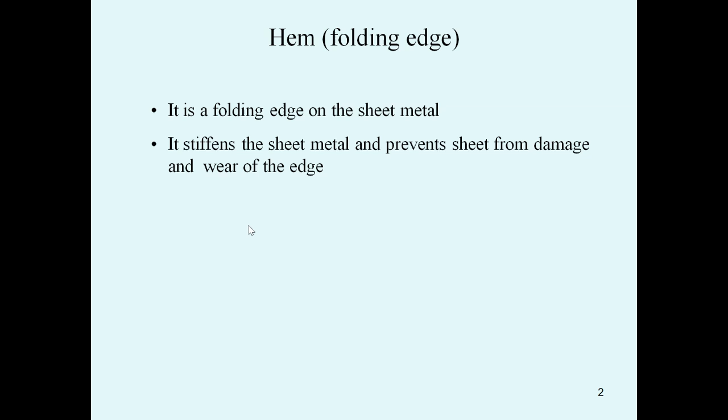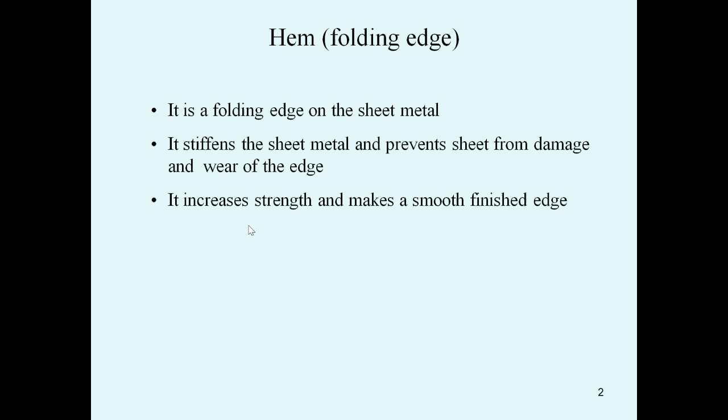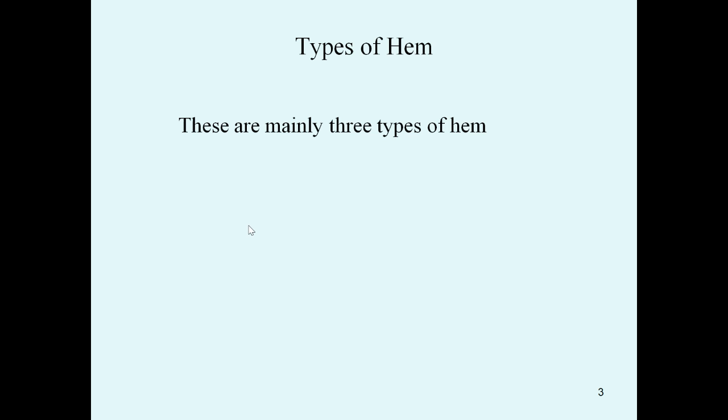Next, it can increase the strength and makes a smooth finished edge. So by hemming process, we can increase the strength of the sheet or folding edge and make smooth finished edges of a sheet. Now we can see what are the various types of hems. There are mainly three types of hems: the first one, the single hem, second, a double hem, and the third one is wired edge.

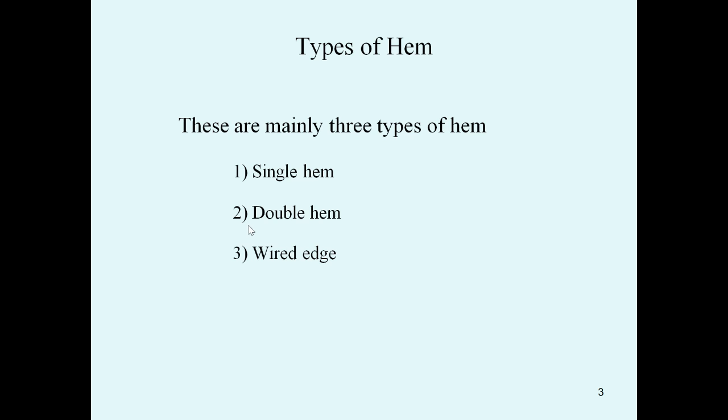Now we can discuss the first type of hem, that is a single hem. Here we can see both the diagrams. In picture one, we can see the layout of the sheet, how much the sheet should be bent. Here we can see the value of w. This is the width of the sheet which is to be folded or bent. In this figure we can see the bending operation of a sheet in a single hem.

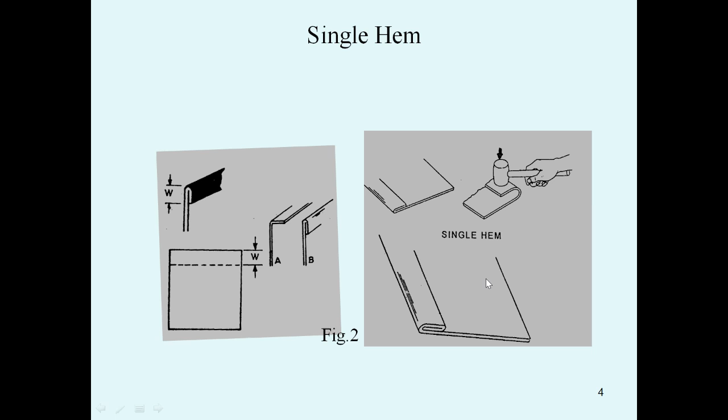Single hem is made by single folding of the edge of the sheet metal. So single hem is nothing but a single folding of the edge of the sheet metal. For the sheet, the edge is folded for a single fold. That comes under the single hem.

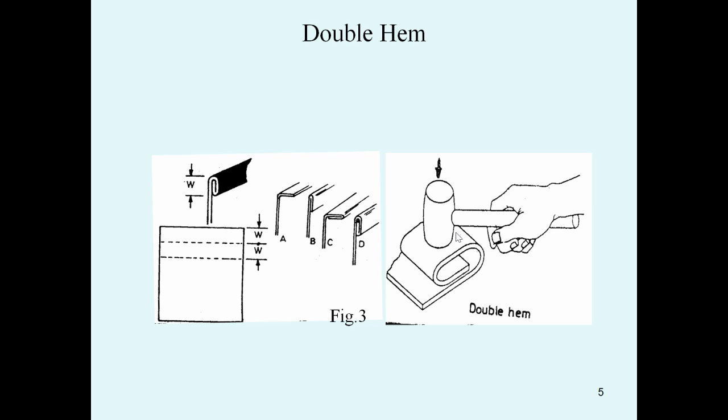Next is double hem. This is a diagram of a double hem. In this diagram we have two widths, the first width and second width which are going to be folded. First we have to fold the upper edge of the sheet for a single hem. Then again it should be folded, so folding of the sheet twice. Here, with the help of a ball peen hammer or soft hammer, we are making a double folding of the edge of a sheet.

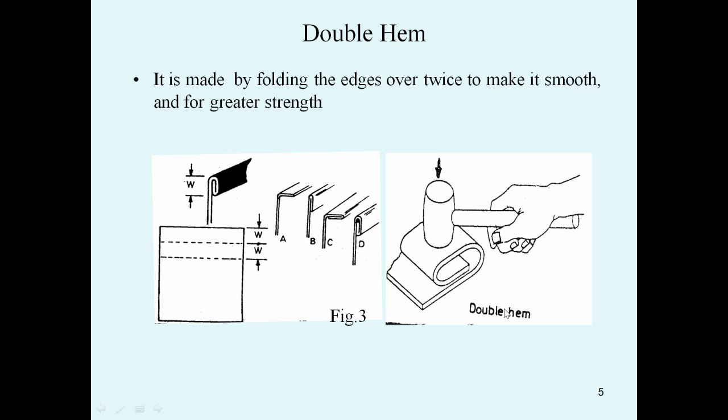Double hem is made by folding the edges over twice. Twice is nothing but two times. It is made by folding the edges of a sheet over twice to increase the strength of the folding. By folding the edges of the sheet over twice, greater strength can be obtained. In these figures we can observe the folding of the edges of the sheet twice.

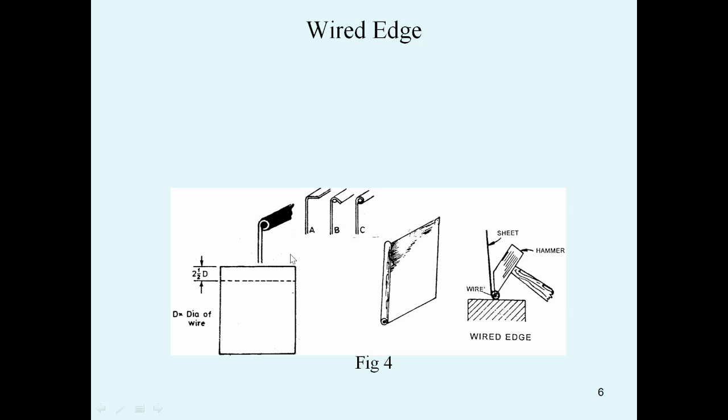Next is a wired edge. We can see the diagram here. This is a diagram of a sheet which is going to be folded like a wire. With the help of a hammer, the sheet is going to be folded like a wire. Here we can see the operation or procedure to fold it like a wire.

Wired edge is the process of folding a piece of sheet metal around a wire of a given diameter, so that we can get a small diameter of the folding of the edge. Next, it provides greater strength than the single hem and the double hem.

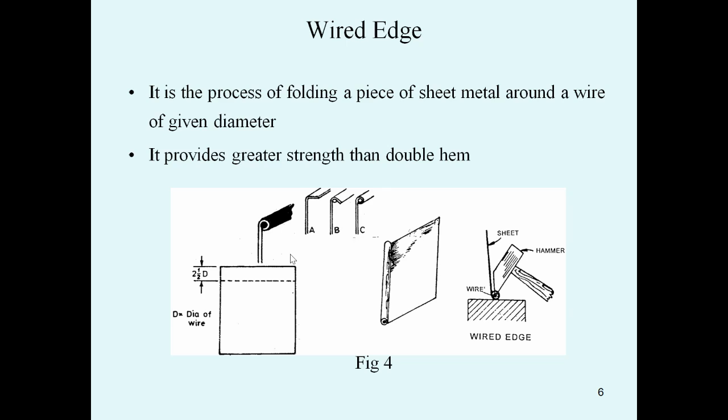Next, allowances for the wired edge. Two and a half times the diameter of wire is taken to fold it around. So two and a half times the diameter of wire.

So it is taken to fold it around. Okay, take it round. So suppose, for example, if a diameter of the wire is 3 mm, that is, if a 3 mm diameter is used, then two and a half times, so it is 7.5 mm. So 7.5 mm must be allowed to form a wired edge.

Okay. So suppose, in case we are using a 5 mm diameter, then how many millimeters must be allowed? So it is 12.5. That is two and a half times, no? So 12.5 mm must be allowed to form a wired edge.

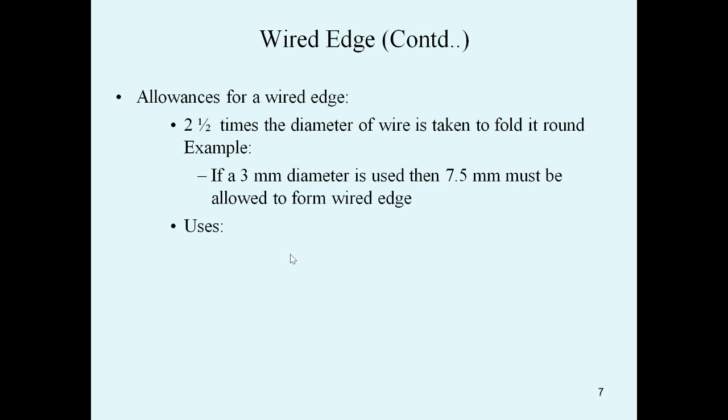Okay. Then we can see the uses of wired edge. So wired edge is formed on articles like funnels, cups, and trays.

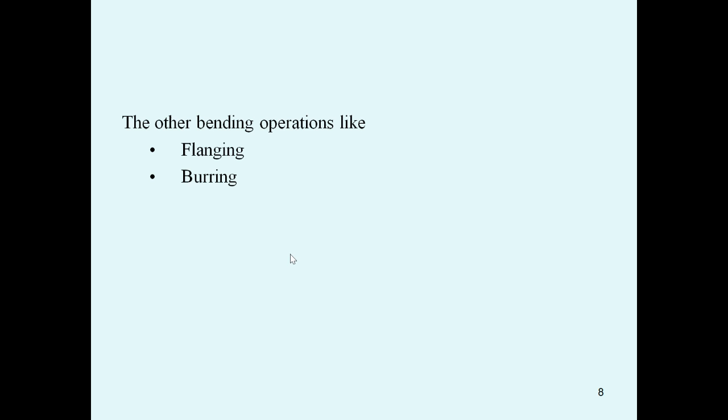Okay. Next, we can see the bending operations like flanging, burring, embossing, beading, raising, hollowing. So these are the different types of bending operations: first is flanging, second burring, third embossing, fourth beading, fifth raising, and sixth one is hollowing.

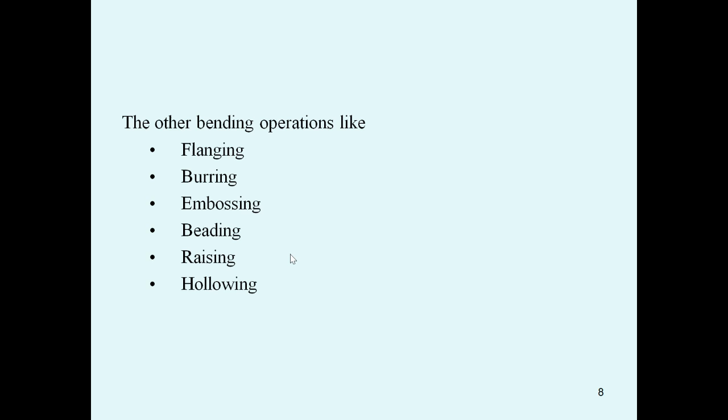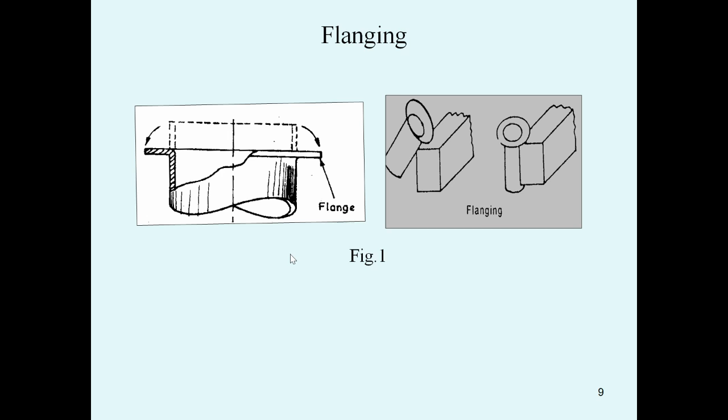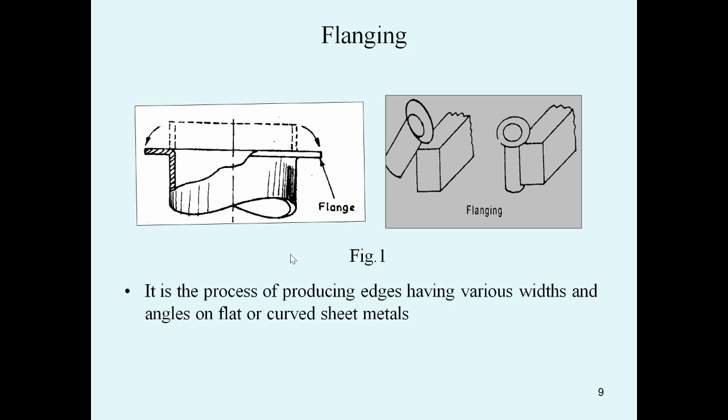You can see here, these are the diagrams of the flanging bending operation. We can observe both the figures. So flanging is the process of producing edges having various widths and angles on flat or curved sheet metals. For curved or flat sheet metals, we can produce edges of various widths and angles.

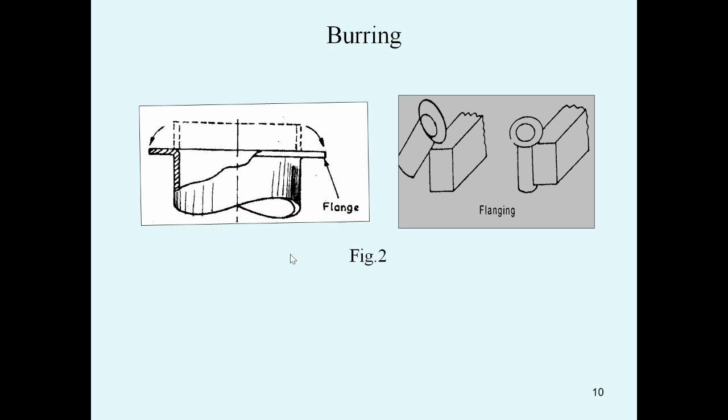Next one is burring. You can see a similar diagram of a flange. So it is the process of making a narrow flange. It is performed on burring machines. So this burring operation can be performed only on burring machines.

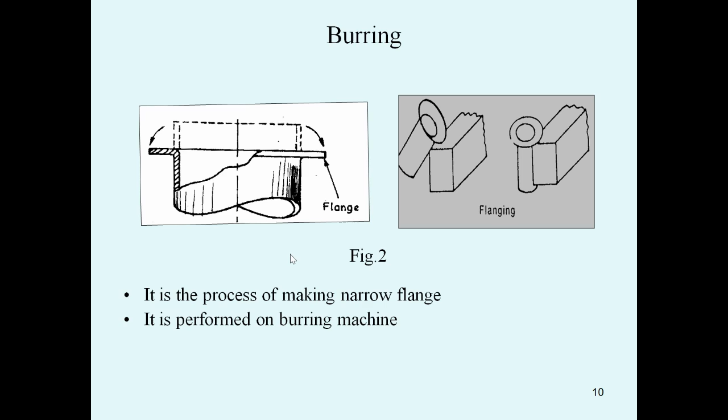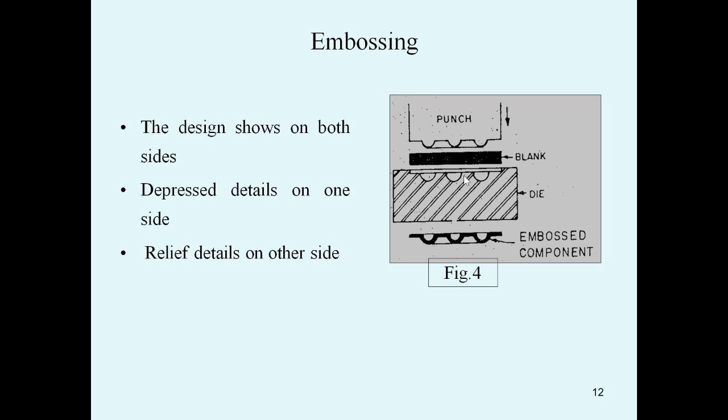Next, you can see the applications of embossing. Letters, that is alphabets, and fancy designs on thin sheets can be obtained.

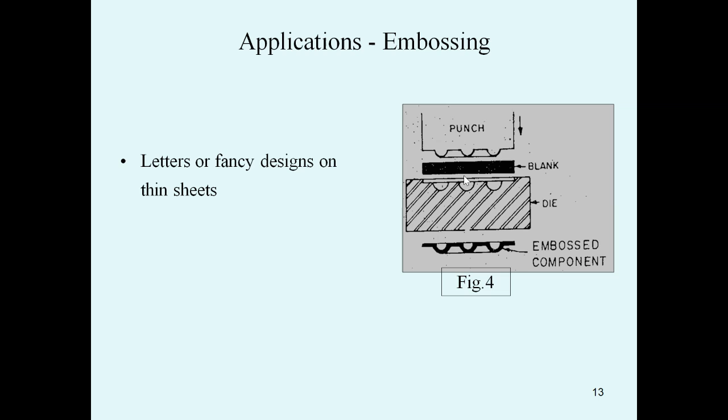Next bending operation is beading. A sheet metal worker beads the surfaces of sheet metal products for a different and neater appearance, and to increase the strength of the sheet. Beading is done with rotary machines and beading rolls.

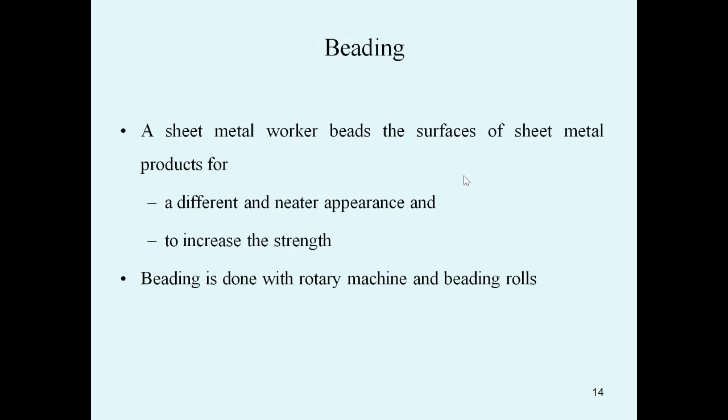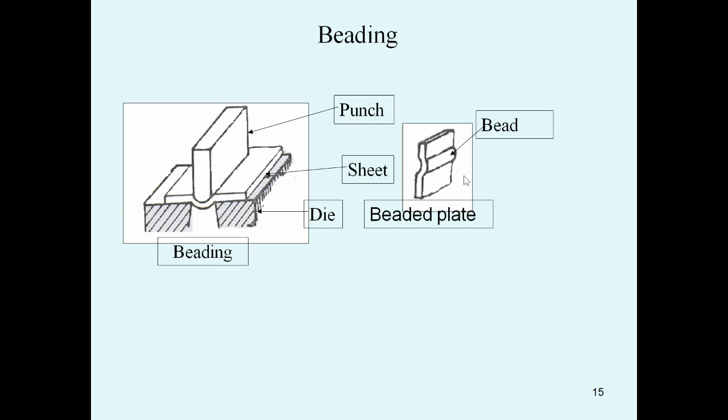Next, this is a diagram of the beading operation. That is the punch and the sheet blank, and this is a die. This is a component, a beaded plate or product. That is a bead. We can observe the figure to get each and every part: the beaded or curled edge.

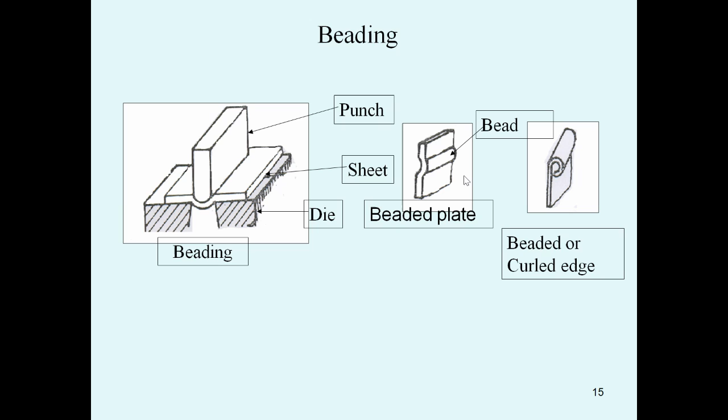Next we can see raising. Raising is the process of making a depression on a flat surface so as to form curved shapes. We apply pressure on the blank sheet so that it forms a curved shape. It is performed by a raising hammer and a raising block.

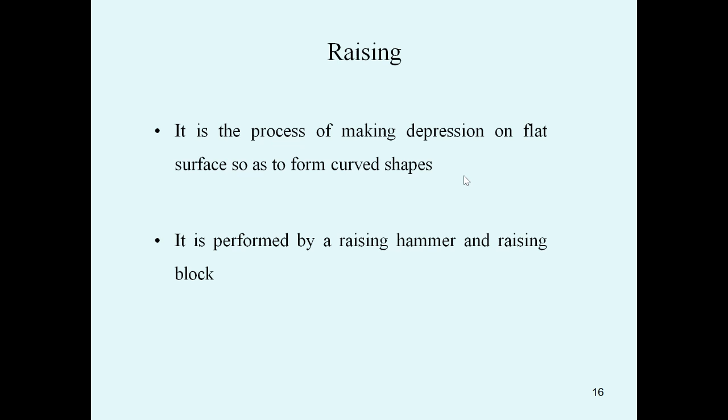So we can see here. Sorry, we are not using any punch and die here. Here we use a hammer, soft hammer, and the stakes. It is performed by using a raising hammer and a raising block. This is a diagram of a raising operation.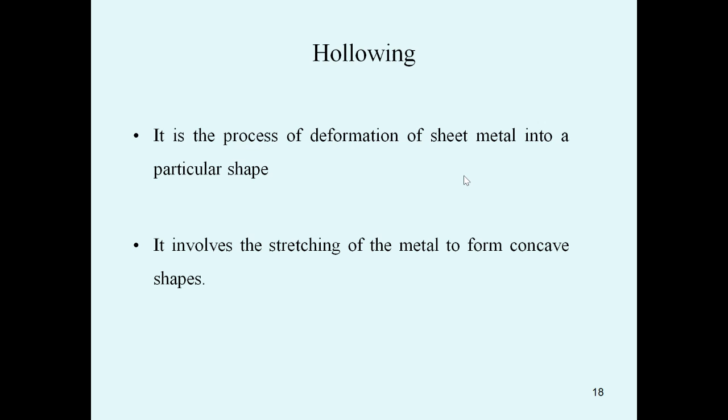Next, you can see the hollowing process: hollowing a bowl on a sandbag. Here we can see this will be a sandbag, and he is doing hollowing.

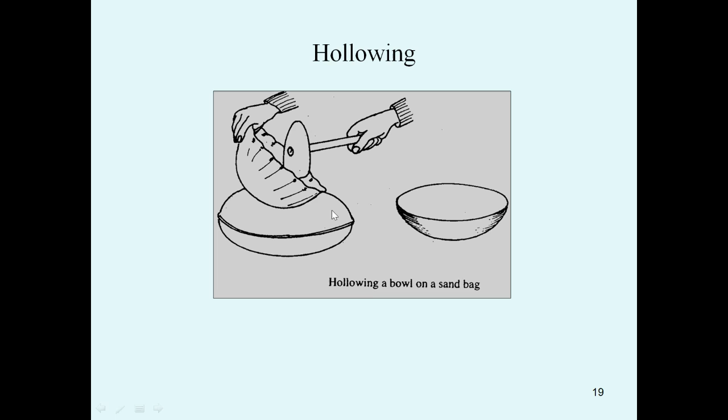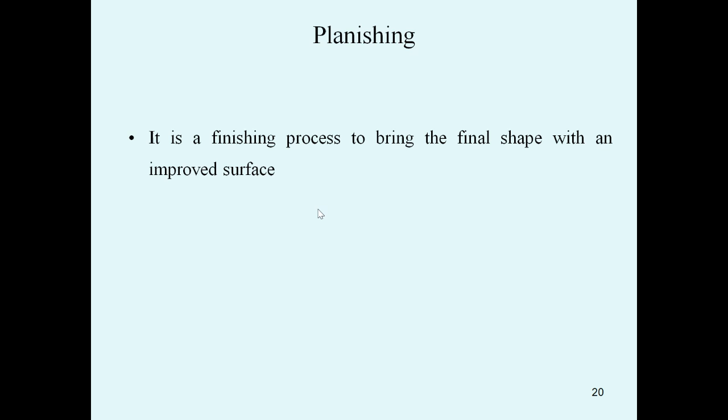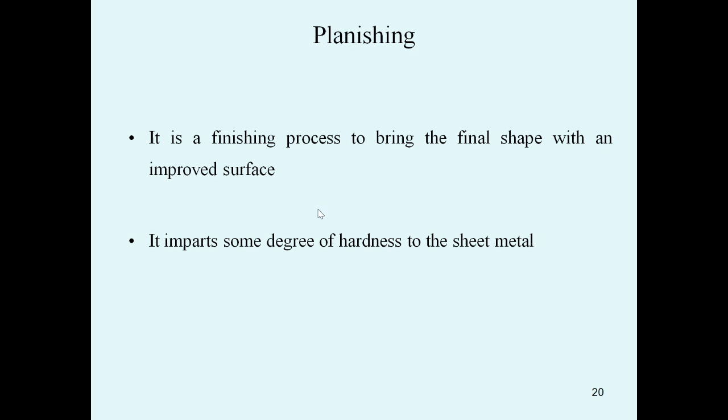Next one is planishing. Here we can see the planishing operation. It is a finishing process to bring the final shape with an improved surface of the sheet metal. It imparts some degree of hardness to the sheet metal. Here we can see the planishing operation.

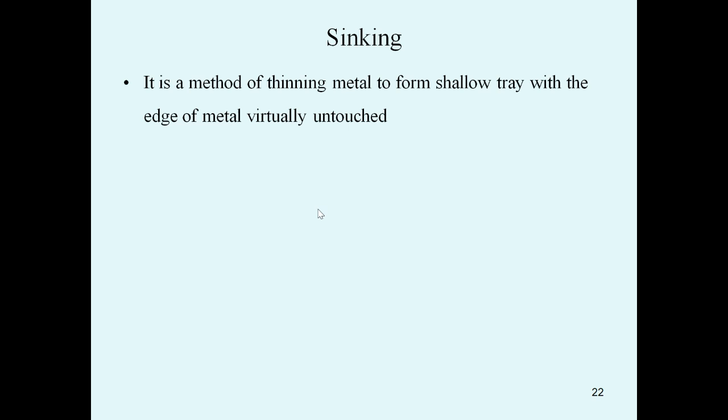Next one will be sinking. It is a method of thinning metal to form shallow trays, with the edge of the metal virtually untouched. Here we can see a diagram of sinking. Here we can observe the parts: hardwood, guide pins, metal thinned.

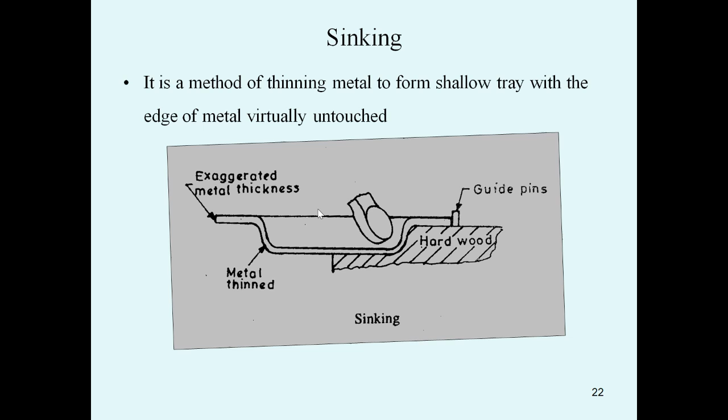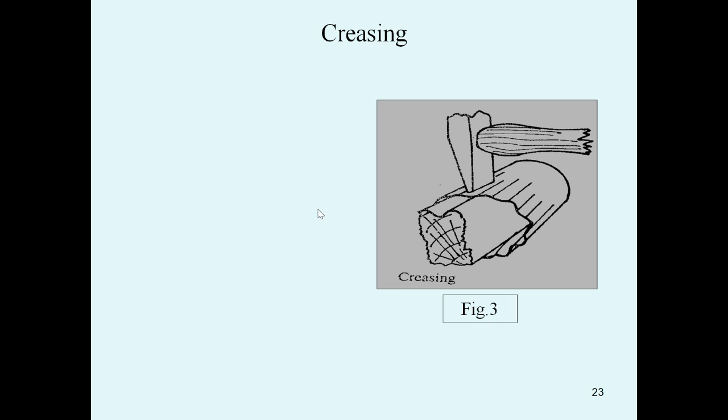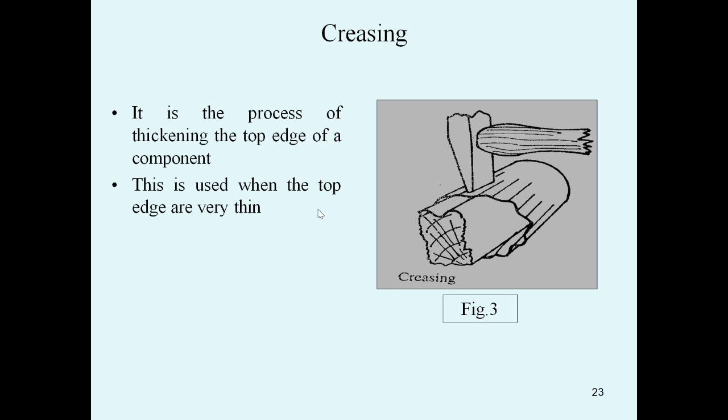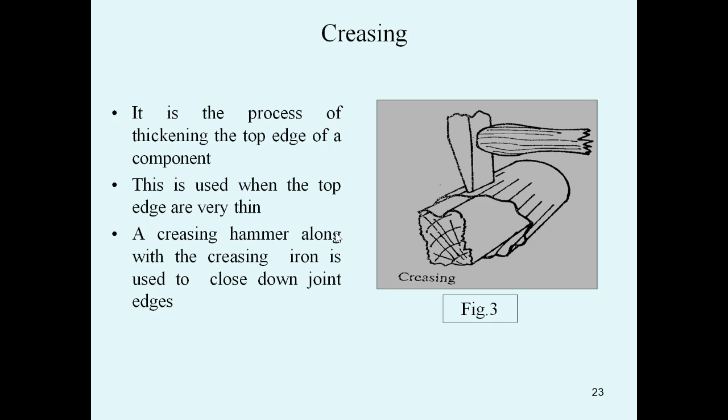Next is creasing. Here we can see the creasing operation. It is a process of thickening the top edge of a component. This is used when the top edges are very thin. A creasing hammer along with the creasing iron is used to close down the joint edges of the sheets.

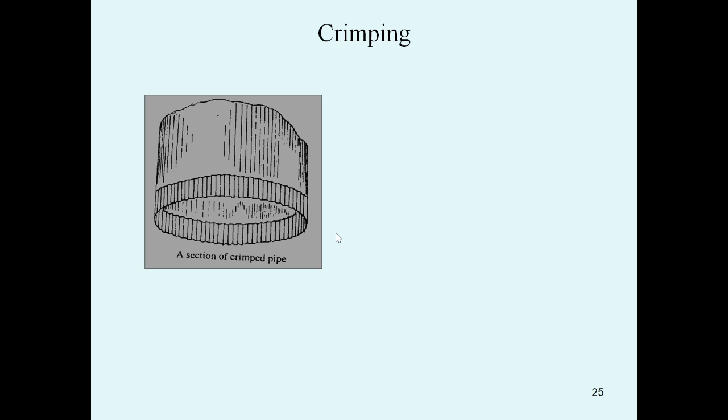Next one is crimping. Crimping is used to corrugate and reduce the size of one end of a pipe so that it will fit into another pipe of the same dimension. You can see here a section of crimped pipe, which is fitted into another pipe of the same dimensions. This is the process of crimping.

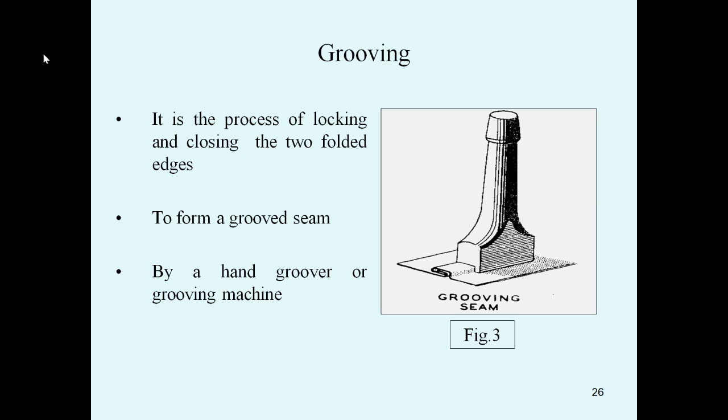Here we take two sheets or a single sheet. Suppose we take two sheets: we fold the edges of the sheets into a grooved shape so that we can lock the two sheet edges and increase the strength of the joint, forming a grooved seam. This operation can be done either by a hand groover or by a grooving machine.

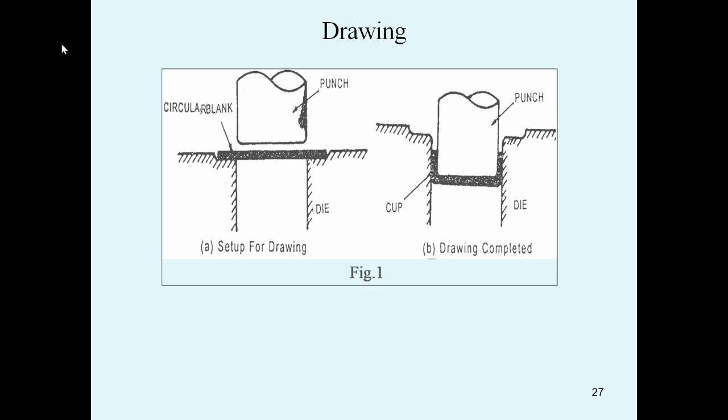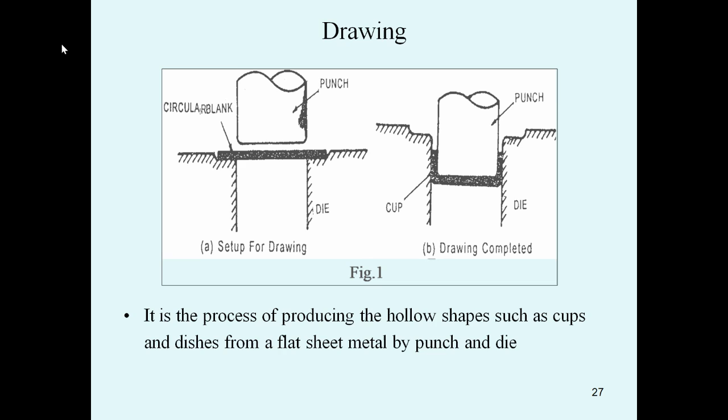If the height of the component or product prepared in this process is greater than the diameter or width, that is called deep drawing.

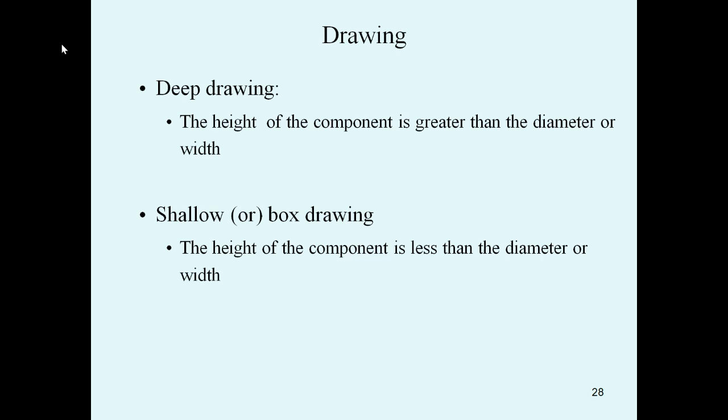Next is shallow or box drawing. Here, the height of the component is less than the diameter or width of the punch or die hole.

Next we can see the operation of squeezing. Squeezing is the process of deforming the sheet metal in a cold state by applying a greater amount of pressure with the punch and the die.

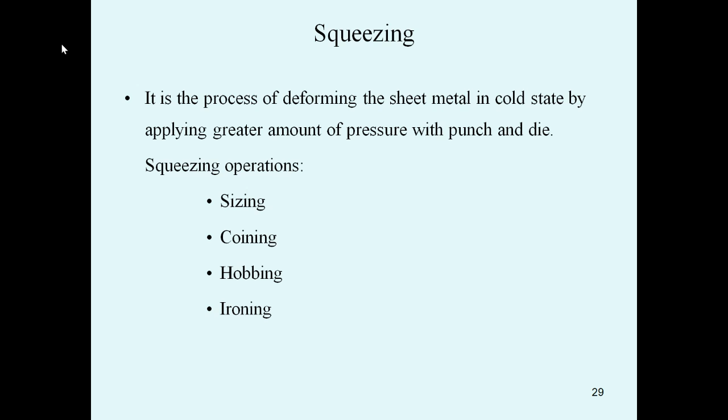The squeezing operations include sizing, ironing, hobbing, and coining. In all these four squeezing operations, we deform the sheet metal in a cold state using a greater amount of pressure with the help of a punch and die, and the procedure is almost the same.

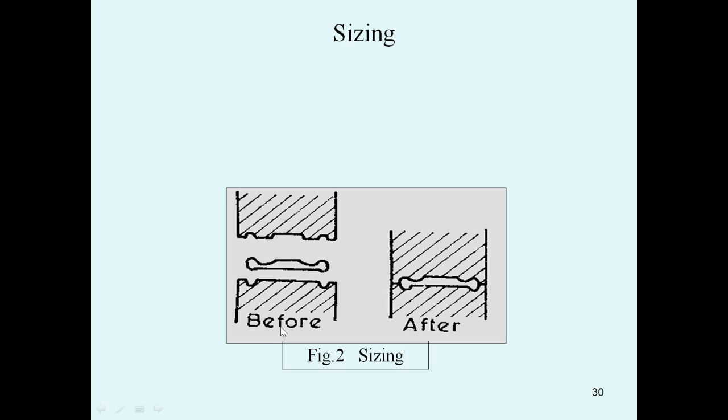Now we can see the sizing squeezing operation. Here we can see the before figure, and this will be the after - before and after.

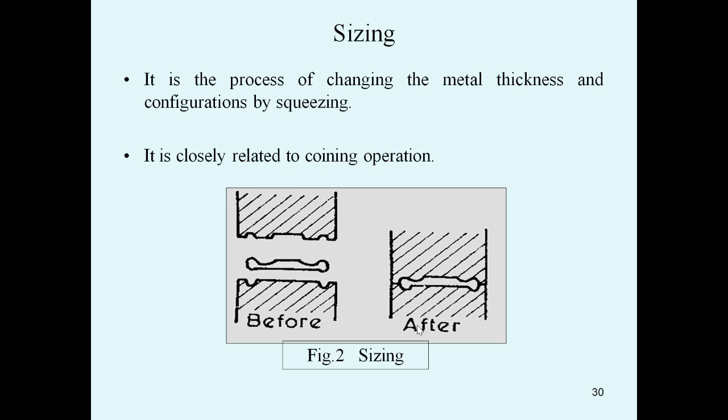Sizing is the process of changing the metal thickness and configurations by squeezing. In this process we change the metal thickness and also the configurations of the workpiece or metal sheet. It is closely related to the coining operation.

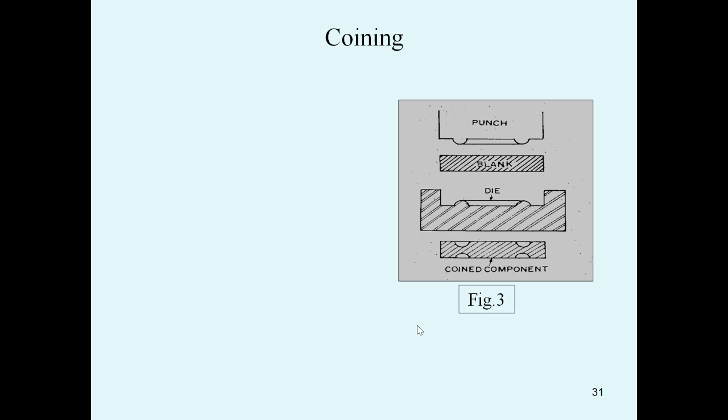Coining is the process of squeezing the sheet metal into the cavity between the punch and the die.

This is employed for making coins, medals, and similar articles. Coins can be made using this coining squeezing operation, medals are also prepared by this coining operation, and some other similar articles.

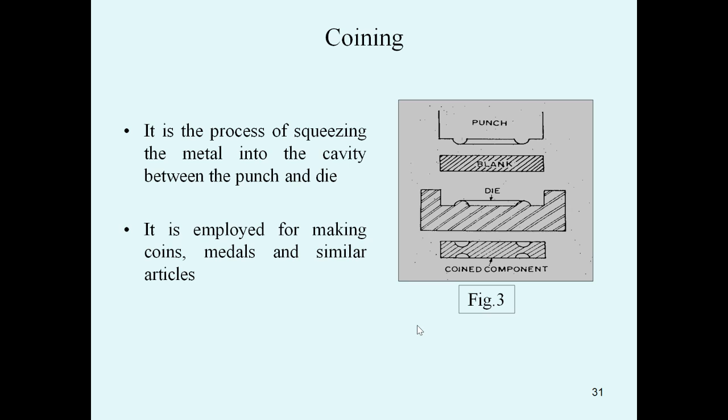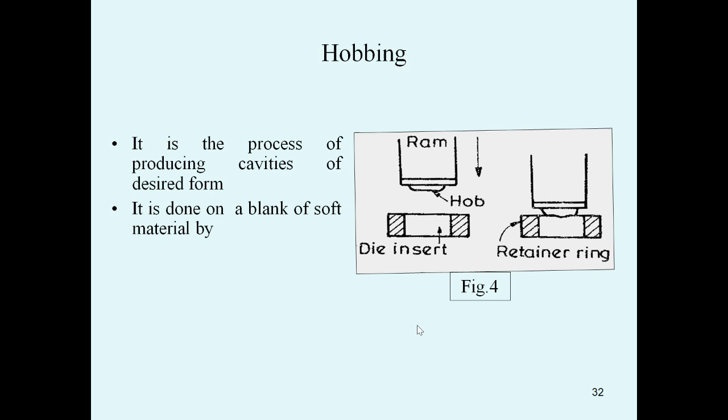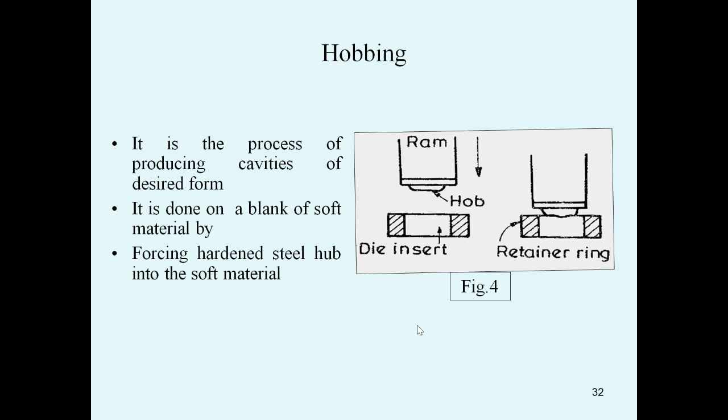Hobbing is the process of producing cavities of a desired form. This can be done on a blank of soft material by forcing a hardened steel hob into the soft material by applying pressure.

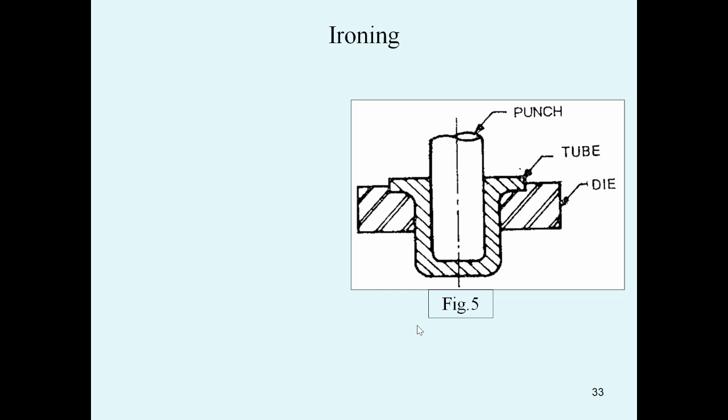Next is ironing. Here we can see the diagram showing the punch, tube, and die. Ironing is the process of reducing the wall thickness of the cup. Whatever cups are prepared by the drawing process, we can reduce the wall thickness of those cups using the punch and the die.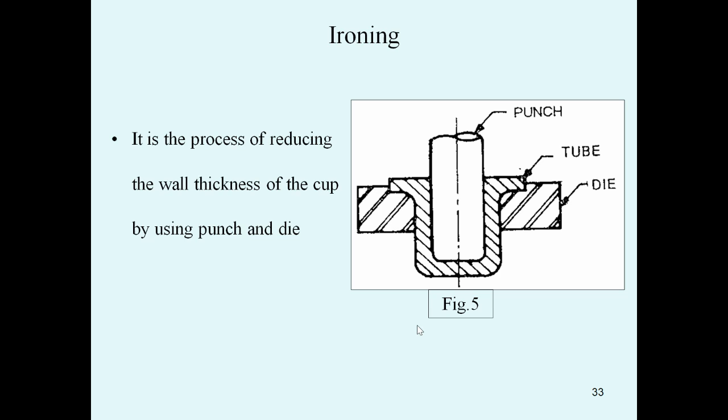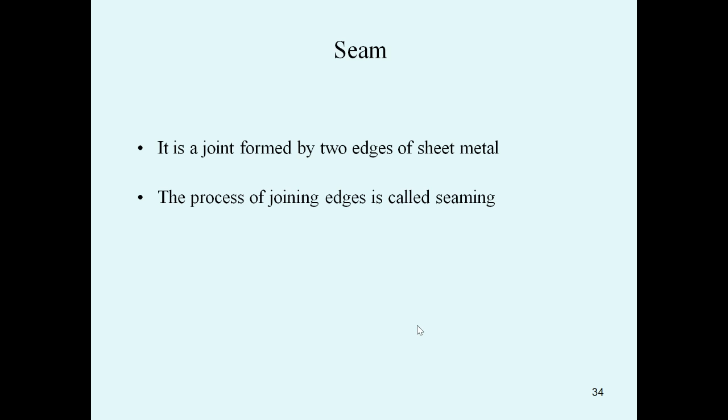Okay, so the next topic is seams. So what is a seam? A seam is a joint formed by two edges of a sheet metal - the edges of two sheets are joined together. The process of joining these edges is called seaming.

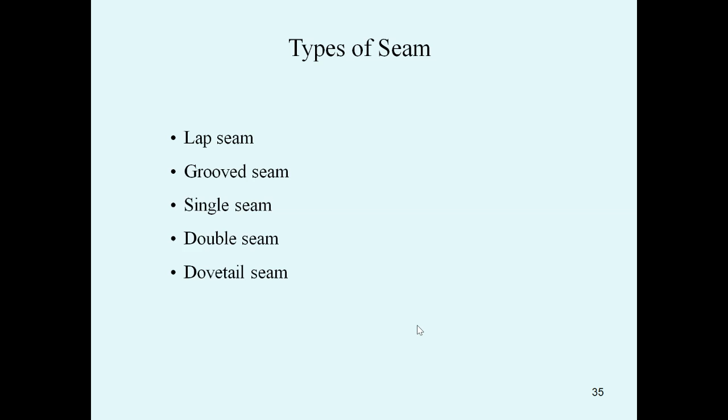Here we can see the various types of seams: first is a lap seam, second grooved seam, third single seam, fourth double seam, fifth dovetail seam, sixth flanged and burred bottom seam, seventh cap strip seam, eighth Pittsburgh seam, and ninth strip joint seam. Now we discuss each of these types briefly.

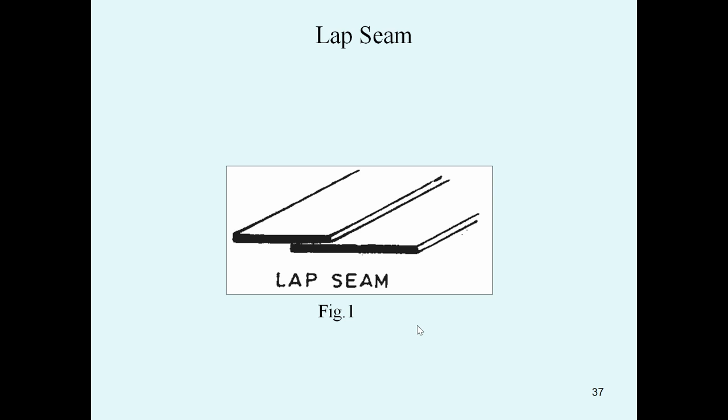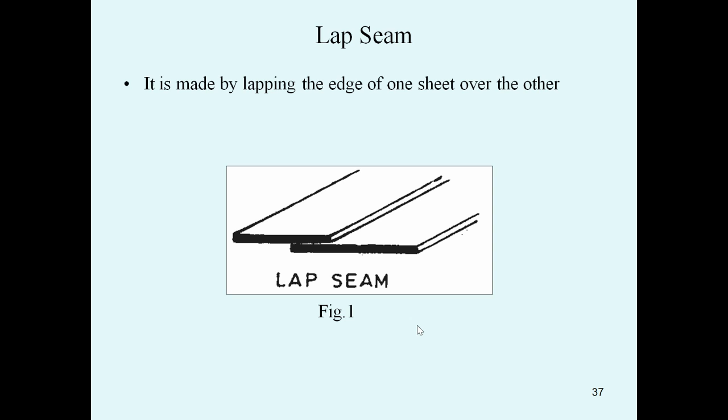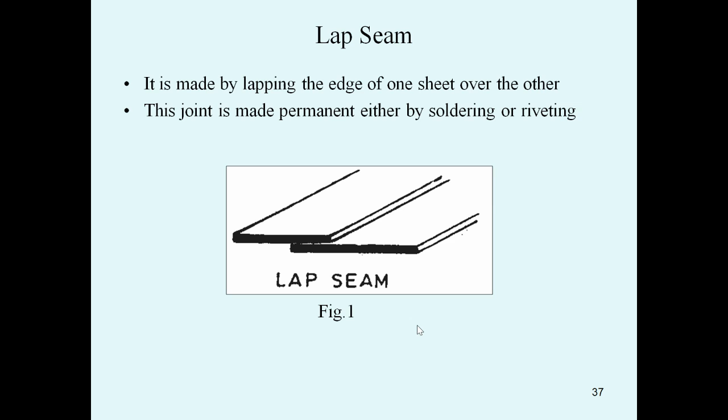This is the placement of sheets in a lap seam - here we place one sheet over the other. The lap seam is made by lapping the edge of one sheet over the edge of the other sheet. This joint is made permanent either by soldering or by riveting, joining the edges of the sheets together to make a single component.

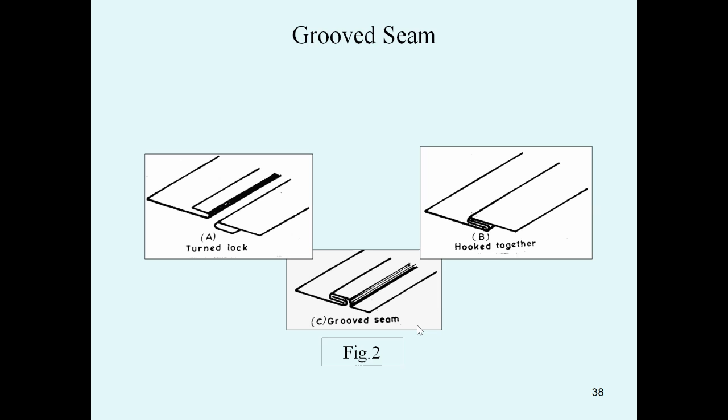Next is the grooved seam. In figure A, the two edges of the two sheets are turned into a lock and hooked together. Then, with the help of a hand groover or machine groover, we make a grooved seam so that a single component is formed. It consists of hooking two folded edges and locking them together with a hand groover.

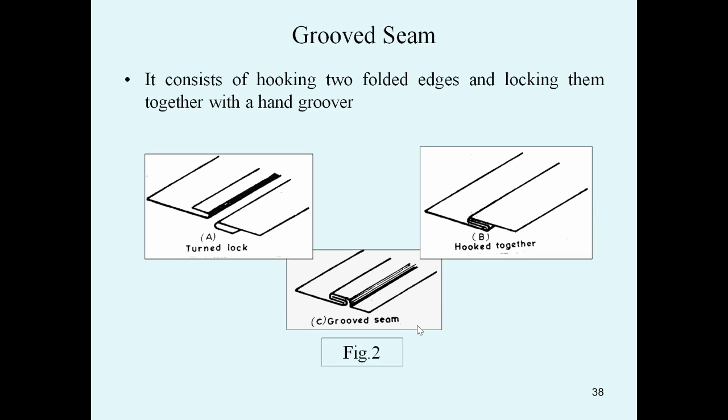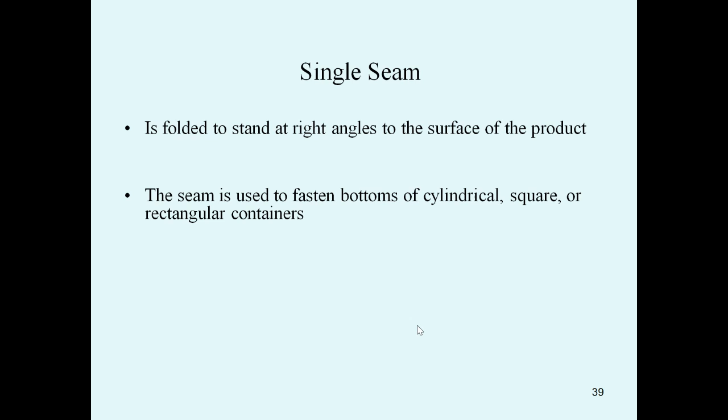Next is a single seam. A single seam is folded to stand at right angles to the surface of the product. This seam is used to fasten the bottoms of cylindrical, square, or rectangular containers. Here we have one sheet and another sheet placed at a right angle, perpendicular to it. By folding these two edges of the sheets, we can make a new component - a completed seam on a cylindrical container.

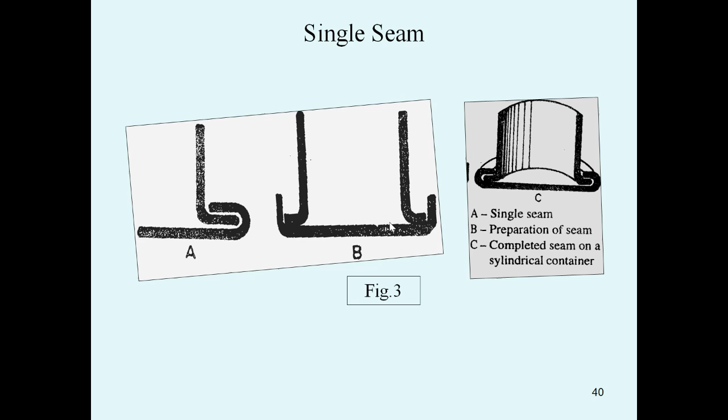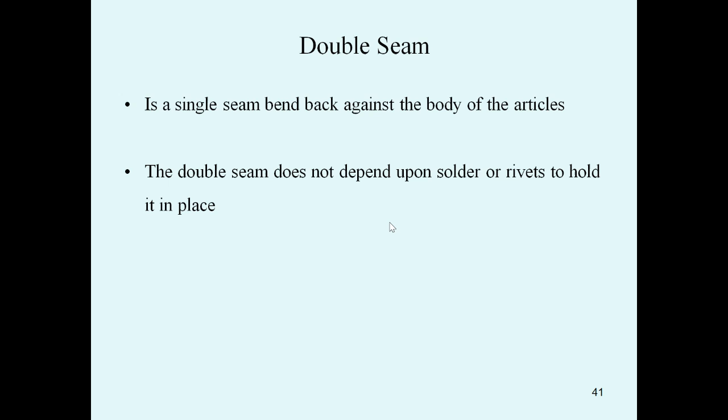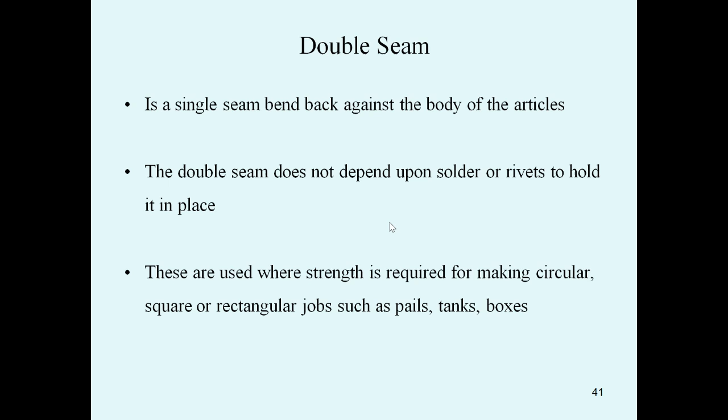The second figure shows the preparation of a seam. Next is the double seam - it is a single seam bent back against the body of the article. The double seam does not depend on solder or rivets to hold the pieces; the edges are folded twice, which increases the joint's strength. These are used where strength is required, for making circular, square, or rectangular jobs such as pails, tanks, boxes, etc.

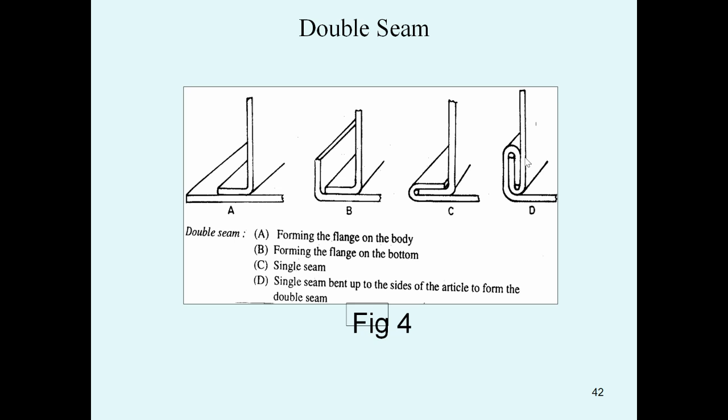This is the preparation of a double seam joint. In figure A, we form the flange on the body, and in figure B, we form the flange on the bottom. Here, this sheet is placed on the body with the flange, and in figure B the flange is placed on the bottom sheet. In figure C we see a single seam, and in figure D this single seam is bent up to the sides of the article to form the double seam. This is the end of the topic.